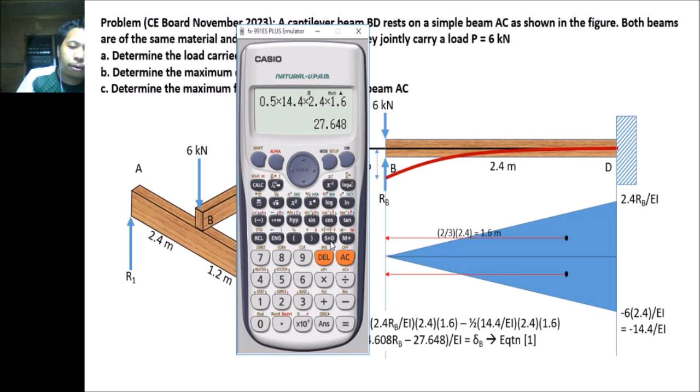Nilabas ko na lang yung EI dito, over EI pa yan. 4.608 RB over EI. Tapos ito naman, wala naman na itong unknown. So this is equal to 0.5 times 14.4 times 2.4 times 1.6. So this is equal to 27.648 over EI, dito nilabas ko na lang yung EI.

So the deviation of point B with respect to the tangent line drawn at D, ito ngayon yan yung magiging deflection natin at point B. So advantageous ang area moment method pagka cantilever, doon na mismo sa support yung ating magiging reference. Okay, so we will represent this as equation 1.

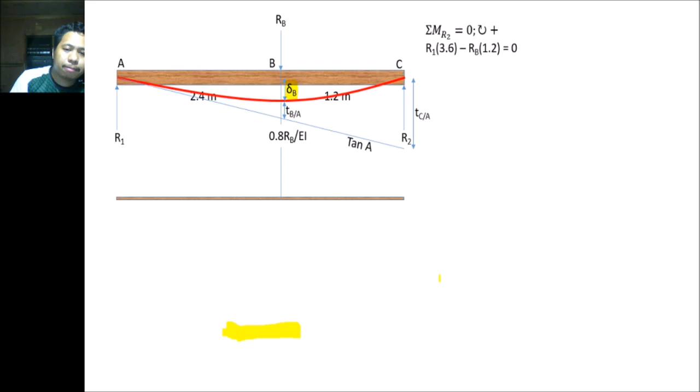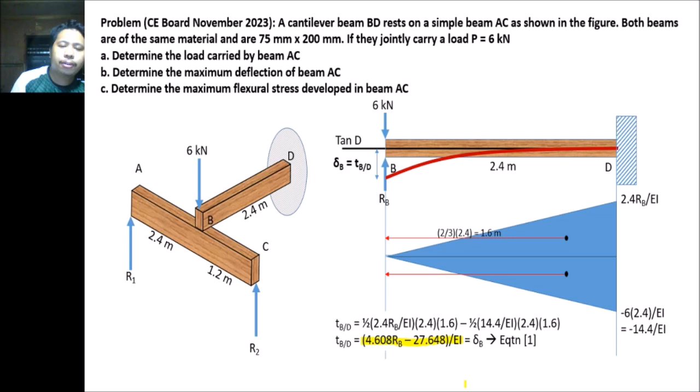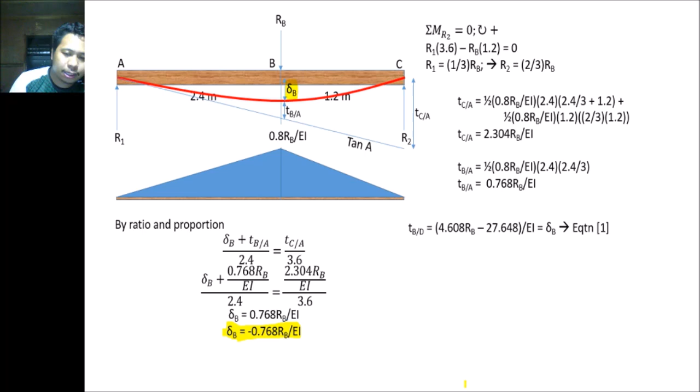So negative is what we use for computation because delta B is clearly downward, it's below. We got from the previous computation: 4.608 RB minus 27.648 over EI. That's what we got here, negative. Although positive was what we computed, negative is what we use because it's below. So that's our equation 1: 4.608 RB minus 27.648 over EI.

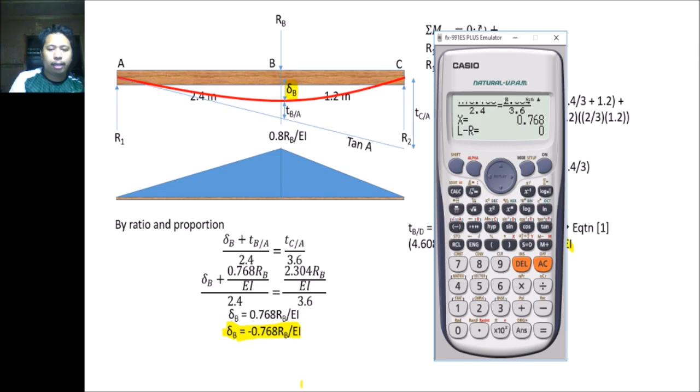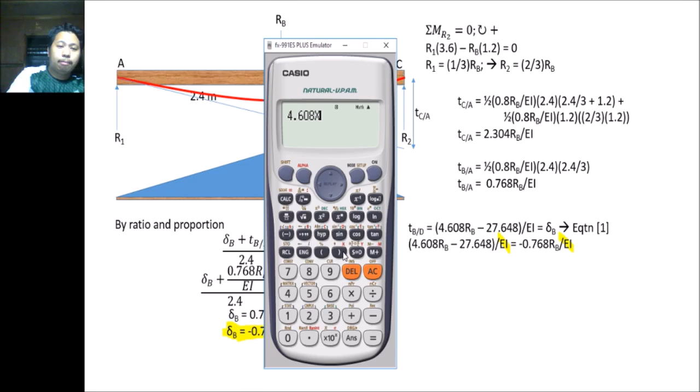Let's equate this, the delta B here. I've already explained why these are equal. We will equate this one, and the EI will cancel out. You can input this in your calculator: 4.608 RB, that's our X, minus 27.648, alpha equals negative 0.768 RB over EI, alpha X.

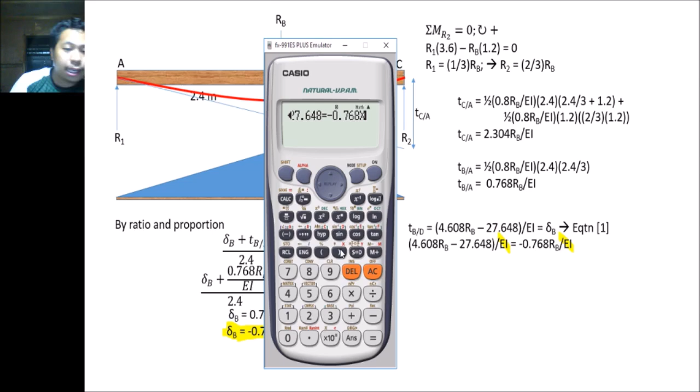If you used positive, the answer is wrong. Shift solve zero, so we have 5.143. So the reaction or the load at beam AC is 5.143. If you used positive instead, let's check - you would get 7.2.

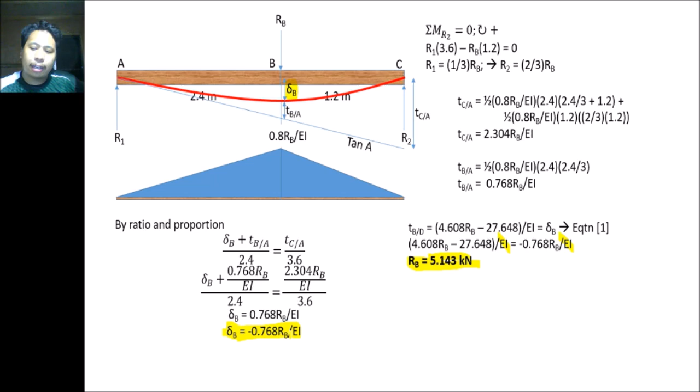So this is the confusing part - we use negative, not positive. As I said, we will use two methods. This first one is the popular method, but the answer from the popular method is actually wrong. We give credit to the author for publishing it, but what was published is incorrect.

So for our second method, we will use double integration or direct integration method. This is more accurate. You just have to lay out the equations. I hope you are well-versed with direct integration method. It's more tedious, but it doesn't require as much additional analysis, so we won't need ratio and proportion here.

We will use direct integration method. Again, this is our beam from before, beam BD, with 6 kN downward and RB upward. We'll use direct or double integration. There are references for double integration, and references for direct integration - they're the same thing. This is EI Y double prime, that is the moment equation.

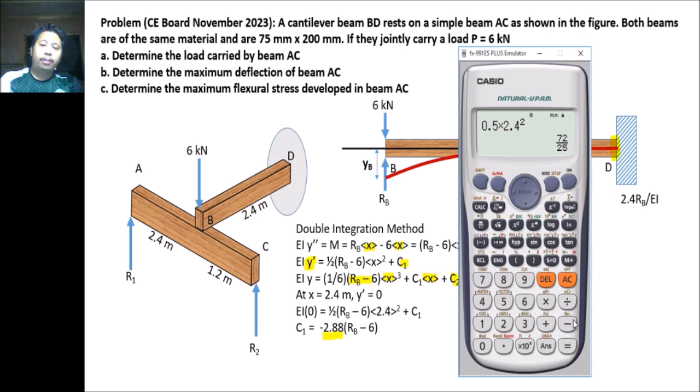Let's check the calculator how much that is. That is 0.5 times 2.4 squared, so that is equal to, yes exactly, 2.88. So we got the value of C1.

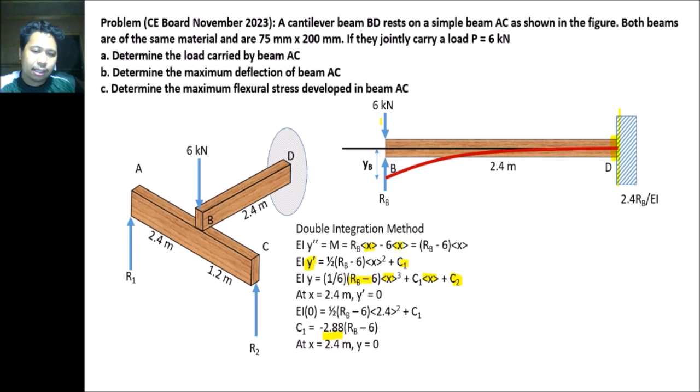Now, another boundary condition not mentioned in the problem is that our support at point D does not yield—it's a cantilever support, meaning there is no deflection at point D. So at x equal to 2.4 meters down here—here x equals 0, here x equals 2.4—Y is equal to 0.

So what we'll use now, since EIY prime was used for the second equation, here we'll use the third equation, EIY. So EI times 0, that is equal to 1/6 times 2.4 cubed minus C1, or plus C1, but C1 is negative 2.88.

So let's substitute the x here. Times 2.4 plus C2, so this becomes 0. Calculating for that, we have C2 is equal to 4.608 RB minus 6. So let's factor out the RB minus 6—positive.

So the equation for the deflection is this: 1/6 RB minus 6, x cubed, minus 2.88 RB minus 6 times x, plus C2, which is 4.608 RB minus 6.

So if we apply that at x equal to 0—what will happen? Like this: this becomes 0 since x is equal to 0, this too becomes 0, so it's gone. What remains is just 4.608 RB minus 6. Clear?

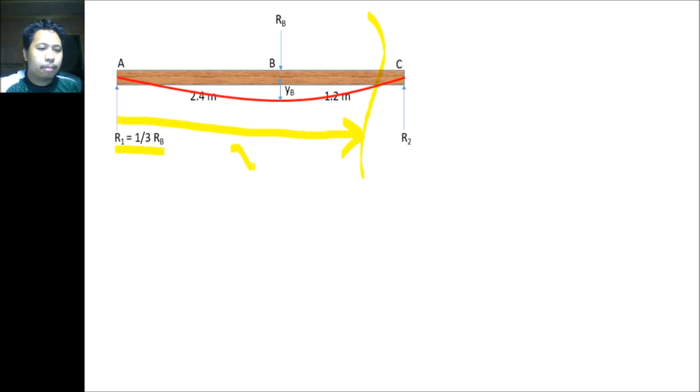So, by double integration method, for EI y double prime, hindi ko na kukunin itong R2, no? Ito yung nakuha natin, 1/3 RB times x, minus ito.

This distance is, tingnan ko kung masulat ko. This is x minus 2.4. Ayan, x minus 2.4. Dito natin siya gina-moment.

So, singularity equation ang ginamit natin, yung bracket na ganyan. Hindi natin yan pwede pag-isahin. Klaro? Hindi natin pwede pag-isahin yung singularity equation. So, we will treat them separately.

So, 1/3 RB, positive man yan, clockwise, times x, minus RB times x minus 2.4. Integrate mo yan, so this is x squared over 2, times 1/3. So, 1 over 1/2 times 1/3 is 1 over 6, RB times x squared.

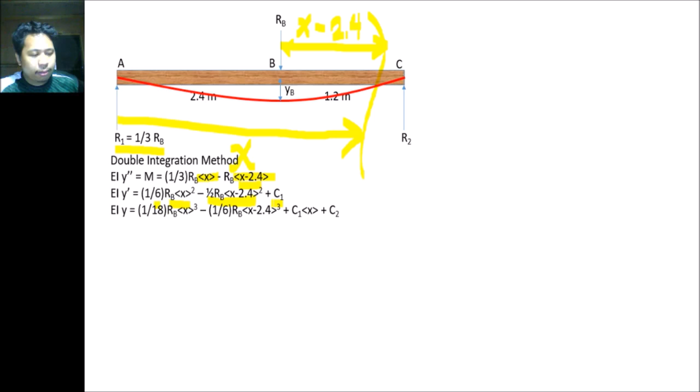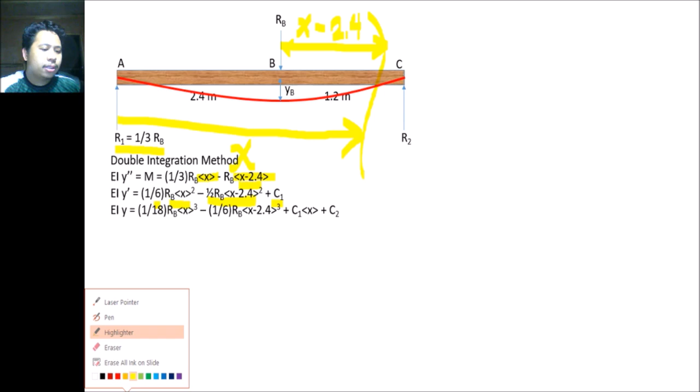Then integrating ulit, this is equal to x cubed over 3, 1 over 3 times 1 over 6, so that is equal to 1 over 18. Tapos, ito naman, x minus 2.4 cube over 3, so 1 over 3 times 1 over 2, 1 over 6, RB times x minus 2.4 cube. Plus C1 x plus C2.

So, ang gagawin nyo lang talaga dito is just simple power rule lang talaga. Pag hindi nyo pa nakuha itong power rule, ewan ko na lang. Pagka ganito, mayroong mga x minus 2.4, you will treat that one as one variable lang. Okay?

So, apply natin yung boundary conditions. Wala namang slope is equal to 0 dito pag simple support. Pero, at the supports, kung hindi nag-yield, deflection niya is equal to 0. So, at x is equal to 0, y is equal to 0. Ito lang yung gagamitin natin.

So, we have EI times 0. Ito ngayon, 1 over 18 RB times 0, so 0. 1 over 6 times, ito ngayon, 0 minus 2.4. Pag singularity equation, once mag-negative yung nasa loob nitong bracket, i-0 kaagad. Klaro? Sa singularity equation, pag nag-0 ito, x minus 2.4, or nag-negative yan, automatic 0. Kaya kung i-substitute natin dito yung x is equal to 0, automatic 0 yan.

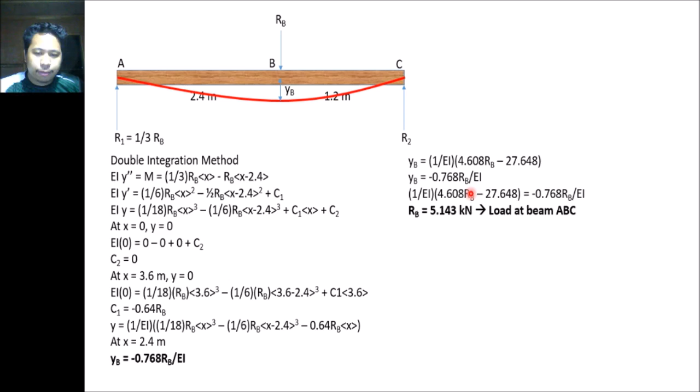So klaro na ito, no? Kaya i-substitute natin, ito yung nakuha natin kanina: 1 over EI, 4.608 RB minus 27.648. Ito ngayon yung nakuha natin ngayon, negative na, no? So wala na tayong magiging confusion dito. So equate natin itong dalawa. Yung RB, which is equal to 5.143, nasolve naman natin ito kanina, no? So ito ngayon yung load at beam ABC.

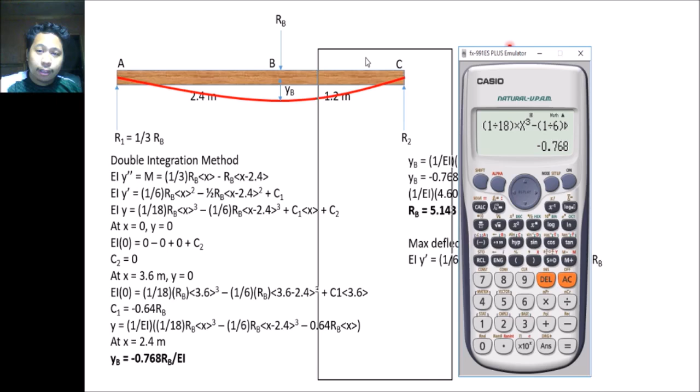Ngayon yung pangalawang tanong, pinapahanap yung max deflection at point at the beam ABC. So if we are going to find the maximum deflection, we need to set EIY prime is equal to 0. So i-set natin EIY prime is equal to 0. So yan yung EIY. Ngayon, para hindi ko rin kayo mahirapan na i-substitute yung 5.143, ganito ang gawin ninyo: 1 over EIY prime, i-equate natin sa 0. So, 0 alpha equals, okay, 1 over 6.

I-kuha nyo kahit yung A na lang, or pwede din B, no? Alpha B, alpha x squared minus 1/2. Okay, yung EIY prime, ito yun. Pero yung C1 natin is ito yun, negative 0.64, times alpha B, quantity x minus 2.4 squared, minus 0.64 RB. So alpha B na lang yan. Bakit alpha C? Alpha B.

So you press Shift Solve. Magtatanong siya kung anong value yung iset natin sa B, kasi kung mag-shift solve tayo, X lang yung kukunin niya ng value. So i-input ninyo 5.143, then solve for X. Okay, 0 na lang natin, 0 yung initial value. So solving for X, the location of the maximum deflection is at X is equal to 2.05, 2.0508. So once nakuha na natin yung location ng maximum deflection, yan yung X.

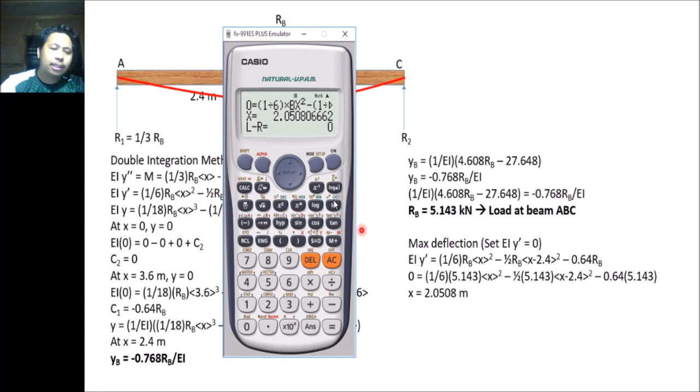I-substitute natin siya dito sa ating, ito, no? This one. Okay. So nakastore na yan sa ating, nakastore na yan sa X, kaya pwede natin i-diretso. So we have 1/18 RB, yung RB natin nakastore na yan sa B, so hindi ko na siya ikuha. RB times X cube, alpha X cube, minus 1/6 RB, nakastore ulit yan sa B natin. Alpha B times alpha ito.

O, wag nyo nang i-input. Pag i-input nyo itong 2.0508 dito, mag-negative yan, so mag-0 yan. Klaro? Wag nyo nang i-input kung mag-0 yan. I hope klaro yan. Dito, X man ito, wala tayong problema, hindi yan mag-negative, positive yan. Dito, 2.0508 minus 2.4, negative yan. So wag nyong i-input, diretso tayo dito. Minus 0.64 RB, na-store yan sa B. Times alpha X. So press nyo na lang yung equals.

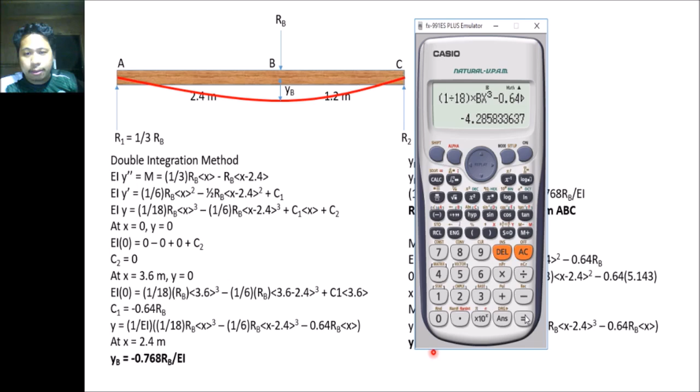So this is equal to negative 4.29. No? Negative 4, 0.29, no? Or yan ba yung lumabas? Ika muna, calc ko muna. 2.0508. So 4.285, but dito 249. Siguro 2.050508 lang yung ginamit ko. So calc, ito yung X 2.05. So there will be discrepancies. So pag ayun ano, 4.286, no? 4.29. So nagkamali ako dito ng type. 4.29, okay. So yan ngayon yung magiging maximum deflection natin, 4.29, paki-correct na lang, 4.29. So ayan, Y is equal to 4.29 over EI.

Ngayon, baka mayroon kayong makita na shortcut formula, wala namang problema na kung gagamitin niyo yun. Kaya lang, masyadong, anong tawag dyan, kung gagamitin nyo pa, baka maubos yung MB ninyo. Dito, wala tayong gi-memorize. Wala man tayong minemorize dito, sa ating process. And yan yung paborito actually ko, yung wala masyadong memorize. Wala namang masyadong memorize dito. Ang gagawin nyo na lang is, i-apply nyo EIY double prime is equal to M, integrate, hindi naman masyadong mahirap. Alin yung i-memorize dyan? Wala. Sa analysis lang. Analysis lang talaga nagkakatalo. Kaya nga, principles of structural analysis and design, kaya you should be more on analysis, not more on memorization. Although kung gusto niyo makuha yung shortcut, ito nga yung shortcut para dyan.

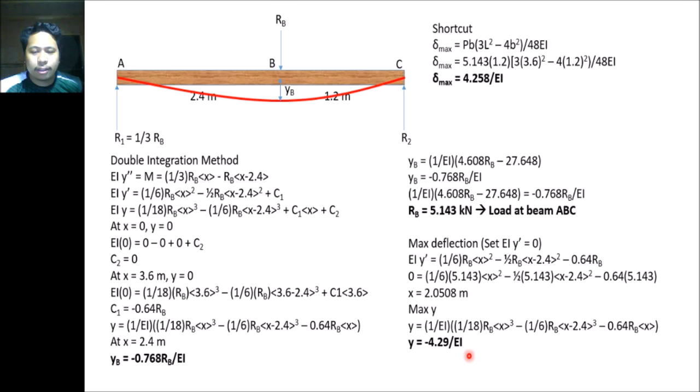Ayan, pakita ko na lang. So ang nakuha niya is 4.258. I don't know if yan talaga yung pinaka-shortcut, pero di yan yung kanyang nakuha, 4.258. Okay, klaro? So I hope klaro lang yung ating discussion.